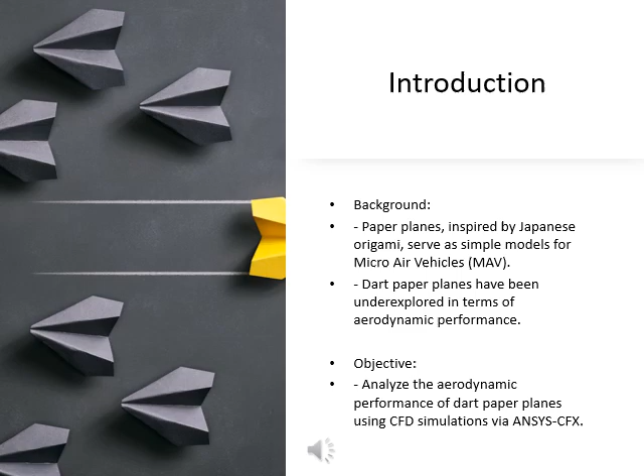There are several challenges we aim to address in this study. First, the aerodynamic performance of dart paper planes has been underestimated in previous research. There is a lack of comprehensive analysis using advanced CFD simulations. Understanding these aerodynamic characteristics is essential for MAV applications. Therefore, our goal is to validate and enhance the understanding of dart paper plane aerodynamics using ANSYS-CFX simulations compared to experimental data.

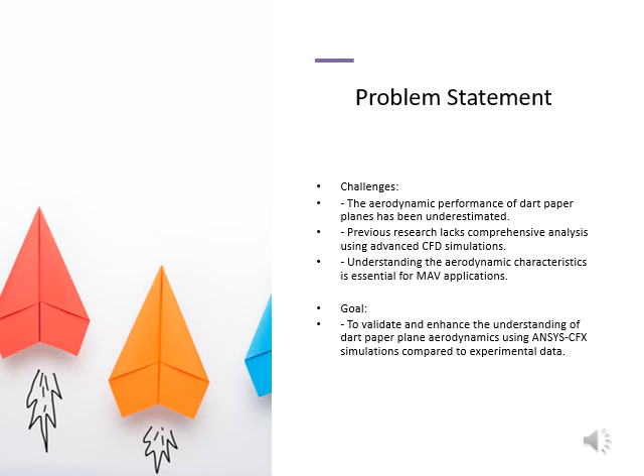Now, let's discuss our methodology. We utilized ANSYS-CFX for steady-state, incompressible flow simulation, employing RANS equations with the shear stress transport, or SST, turbulence model. For design and simulation, we modeled the paper plane using SolidWorks. The geometrical and flow domain were set up in ANSYS Design Modeler, and meshing was done in CFX with a hybrid mesh for detailed flow capture.

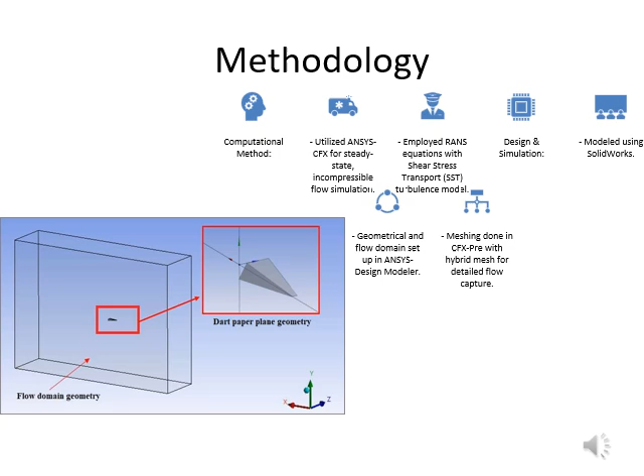Moving on to the experimental setup, we used the following specifications. The paper thickness was 0.2 millimeters, equivalent to A4 paper, with a span of 160 millimeters and a wing area of 20,000 square millimeters. The chord length was 250 millimeters, with a leading edge sweep angle of 75 degrees. The weight of the paper plane was approximately 5 grams, with an initial speed of 5 meters per second and an angle of attack, or AOA, of 5 degrees.

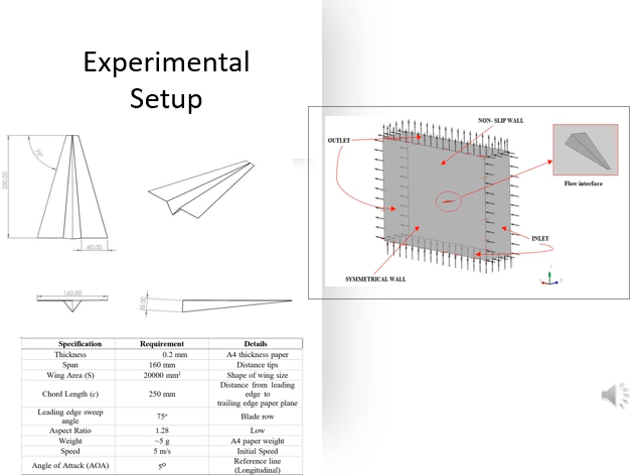The boundary conditions included an inlet velocity of 5 meters per second, zero pressure at the outlet, and symmetrical wall conditions. Next, let's look at the lift performance. The lift coefficient increases linearly with the angle of attack, until it reaches the stall angle, after which it decreases. The maximum percentage differences between our simulation and experimental results were as follows. Lift coefficient magnitude at 11.9%. Maximum lift coefficient at 29.5%, and stall angle at 24.2%.

In the pre-stall region, from angle of attack 0 degree to 10 degree, lift coefficient increases significantly and our simulation closely matches the experimental results. In the stall region, beyond angle of attack 10 degree, lift coefficient decreases sharply, with a slight divergence between the simulation and experimental results.

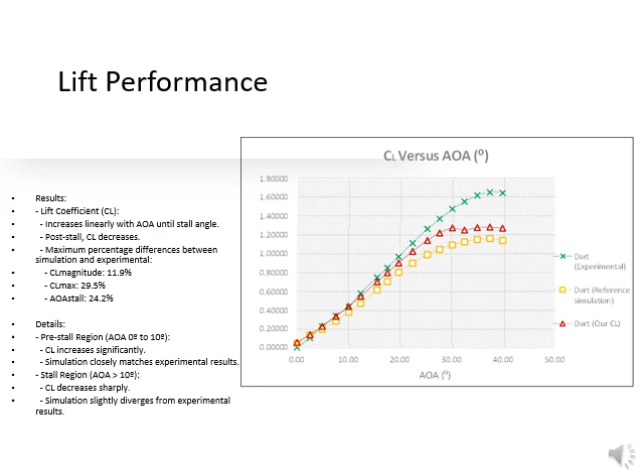Now, let's discuss the drag performance. The drag coefficient trends increase with angle of attack. Notable percentage differences in drag coefficient magnitude were observed at different angle of attack ranges. 37.3% at angle of attack 0 degree to 10 degree, 9.9% at angle of attack 12 degree to 20 degree, and 0.3% at angle of attack 22 degree to 30 degree.

In the low angle of attack region, from 0 degree to 10 degree, drag coefficient increases moderately, showing a higher deviation in drag coefficient magnitude between the simulation and experimental results. In the medium angle of attack region, from 12 degree to 20 degree, drag coefficient increases sharply with simulation results aligning closely with experimental data. In the high angle of attack region, from 22 degree to 30 degree, drag coefficient continues to increase, with minimal differences between simulation and experimental results.

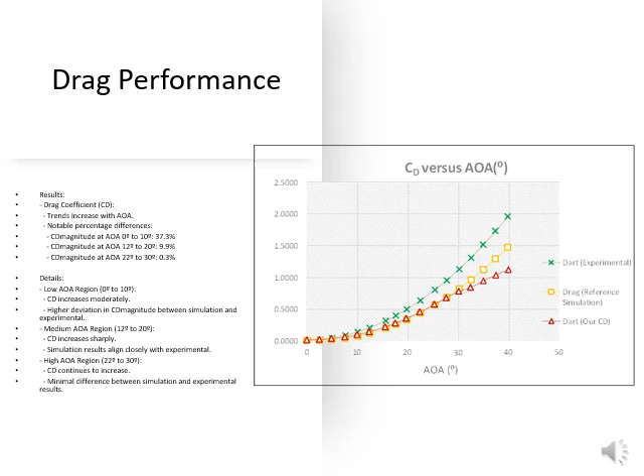Finally, let's examine the aerodynamic efficiency. The lift-to-drag ratio, which is a measure of aerodynamic efficiency, increases at early angle of attack stages, less than 5 degree, and decreases at higher angle of attack stages, greater than 5 degree. Our simulation results showed higher lift-to-drag ratio compared to experimental results, with the experimental maximum lift-to-drag ratio being 4.7951 and the simulation maximum lift-to-drag ratio being 5.8377, a percentage difference of 33.2%.

In the early angle of attack stages, from 1 degree to 5 degree, the lift-to-drag ratio increases significantly, showing similar trends in both simulation and experimental results. However, at higher angle of attack stages, the lift-to-drag ratio decreases due to increasing drag, with higher magnitudes observed in the simulation results compared to the experimental results.

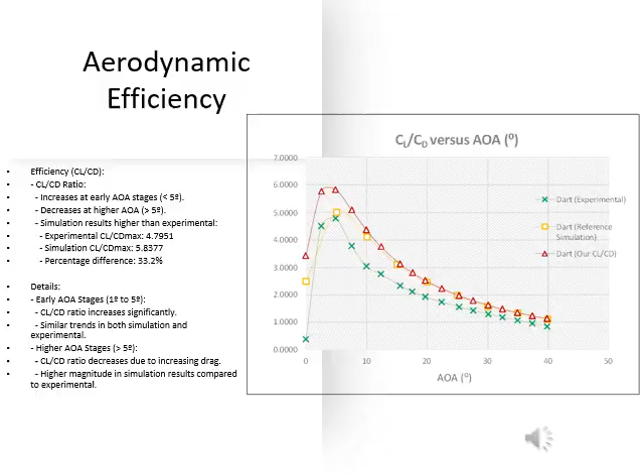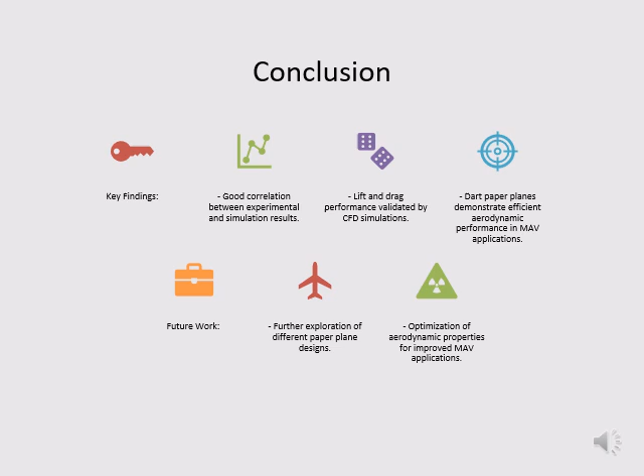In conclusion, our study demonstrates good correlation between experimental and simulation results, validating the lift and drag performance of dart paper planes through CFD simulations. This indicates that dart paper planes exhibit efficient aerodynamic performance, making them suitable for MAV applications. Future work could involve further exploration of different paper plane designs and optimization of aerodynamic properties to enhance MAV applications.